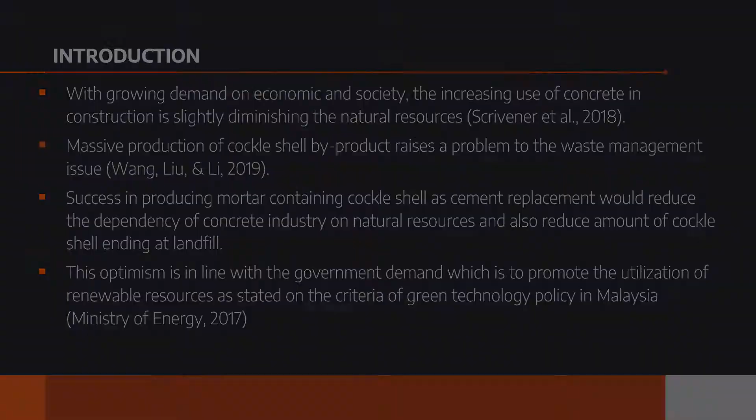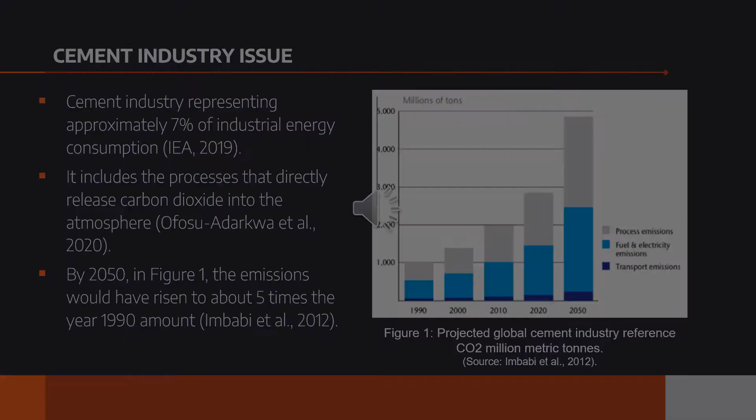Moreover, in 2015, a total of 10.87 thousand metric tons of cockles were obtained from the fishery industry in Malaysia. Even though the shell can decompose by itself, it takes a long period of time. As cockle shells are organic waste material usually dumped without any reuse value, serious ecological issues have been highlighted by environmental activists as the shell is not well treated.

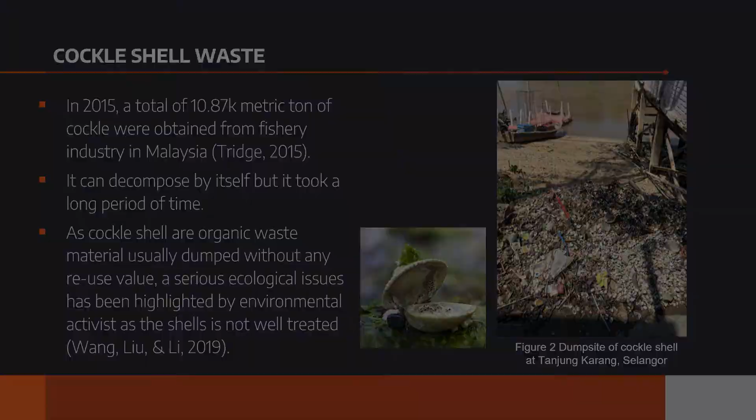The objective of this research is to determine the compressive strength and water absorption of mortar containing cockle shell powder as partial cement replacement.

The significance of the research is that information on the performance of mortar containing powdered cockle shell as partial cement replacement can be obtained. When cockle shell is used as an alternative to replace cement, it can possibly cut down the waste from the cockle industry. Not only that, the dependency on limestone for cement production can also be reduced.

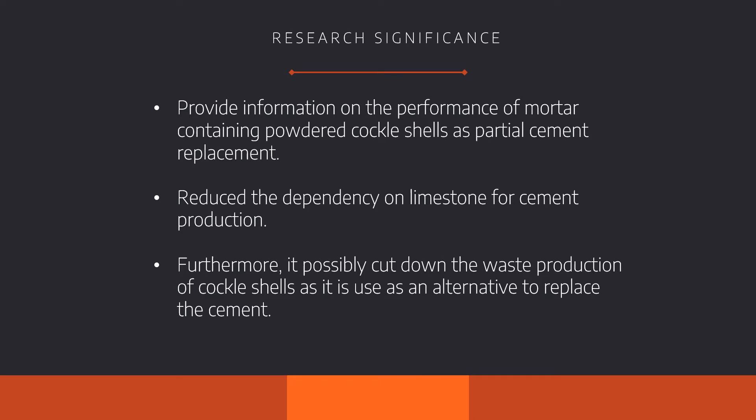These are the overall research details. Next, these are the list of the mixed ingredients.

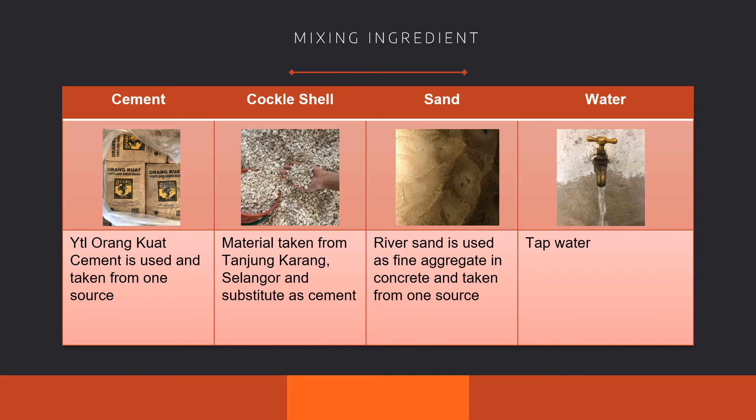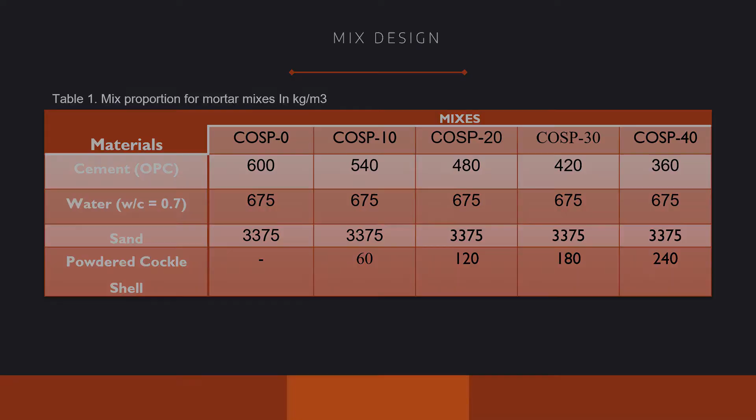Moving on to the next slide, the results and findings. First, as shown in the graph, the results show compressive strength of powdered cockle shell mortar in two curing regimes, which are water cured and air cured. The strength of mortar in water cured is higher than air cured.

This is because the water keeps the concrete moist during the hardening process. That means concrete hardens due to chemical reaction, not because it dries by itself. However, both methods show the same pattern of results. Compressive strength for all curing ages is higher at a proportion of 10%, but the strength will decrease if the percentage replacement of cockle shell content is increased up to 20%.

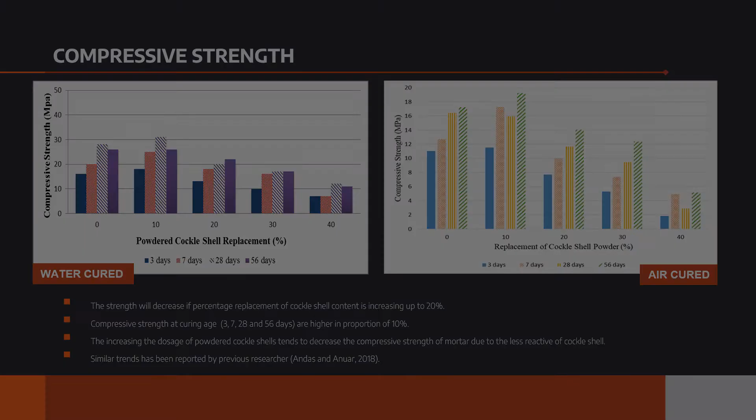The increasing dosage of powdered cockle shell tends to decrease the compressive strength of mortar due to the lower reactivity of cockle shell. For water absorption, as the cockle shell powder content replacement is increased, the water absorption rises, showing that higher cockle shell powder content in mortar displays a more porous nature. The decreased volume of capillary void caused by high compactness of cockle shell mortar, at a proportion of 30%, makes the water absorption decrease.

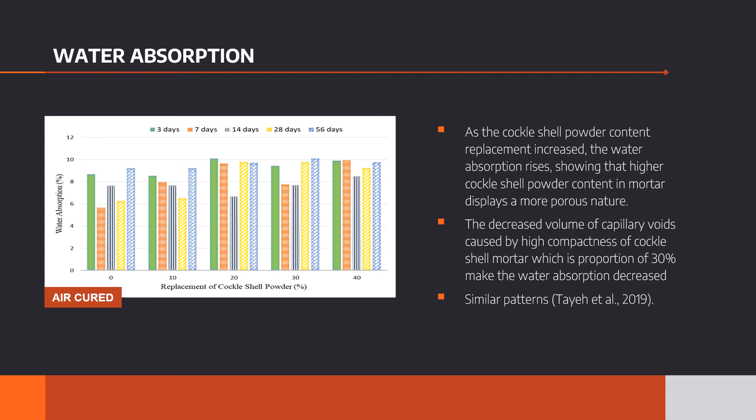In a nutshell, the incorporation of 10% of cockle shell powder has greater compressive strength, but when the replacement of cockle shell is increased, the strength is likely to drop eventually. Nevertheless, at 7 days of curing, the 10% replacement showed lower water absorption, and performance in the use of cockle shell for the manufacture of construction material is a beneficial way to recycle this material instead of shipping it to landfills.